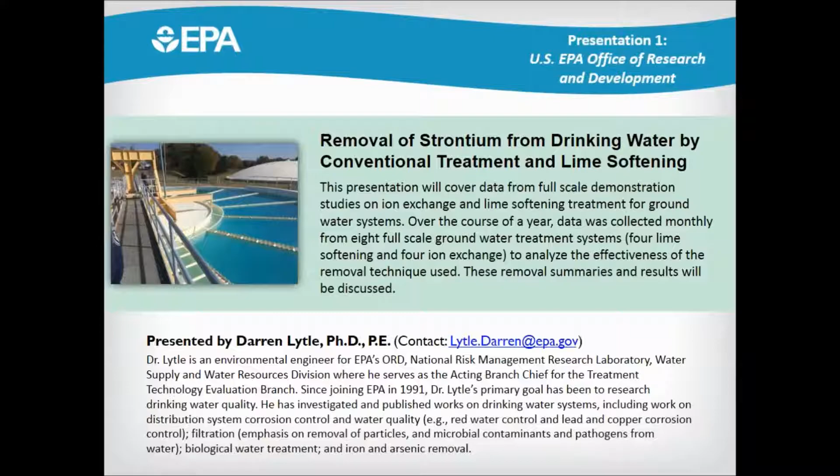All right, thank you, Tom. Just to start out, you can see the title of my slide has changed from the original title. The original title had conventional water treatment, and I can tell you right now up front that conventional treatment does not remove strontium, so we're not going to talk about that, but rather we'll talk about ion exchange and lime softening approaches. I want to start out by acknowledging my co-investigators, Hannah Chait, Dan Williams, Miley Pham, and Christy Mullen.

Let's see here. Get this. Okay, hold on a second. There we go. Okay, start out with my EPA disclaimer.

Just a little bit about strontium and its elemental properties. It's a naturally occurring alkaline earth metal, and most importantly, it behaves like calcium chemically. So certainly we can think of the treatment approaches that we use for calcium removal are probably going to be effective for strontium removal. It does have a number of manufacturing usages, including...

Alloys, fireworks, ceramics, glass. It's used to block X-ray emissions from cathode ray tubes. In terms of where it's found naturally, it's found and widely distributed through the Earth's crust and the ocean. In fact, if you see surface waters along the oceans, you'll find elevated levels of strontium in some of those waters impacted by the ocean waters. The majority of strontium compounds are soluble, and the main exposure routes are through drinking water and various foods.

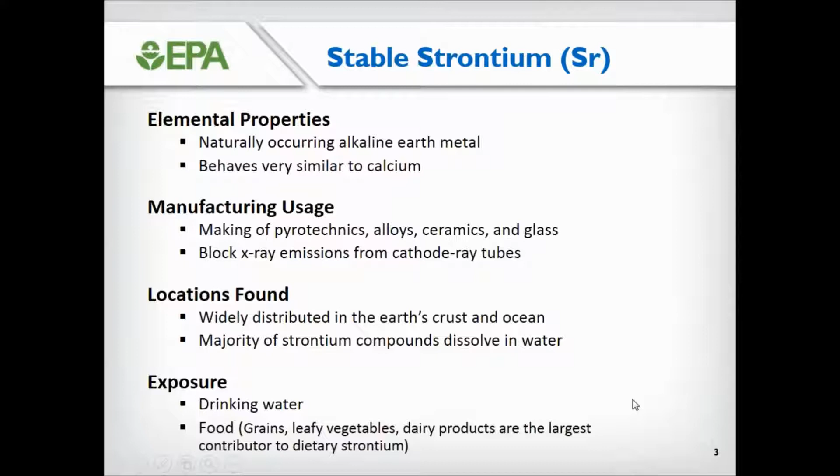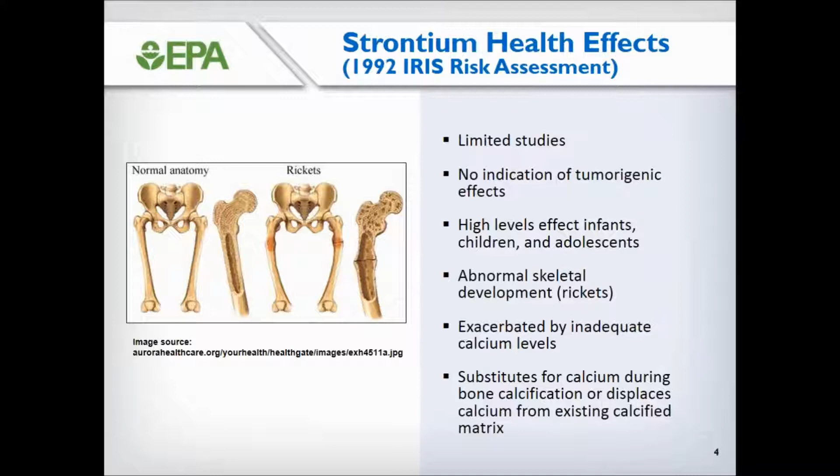Why we're concerned about it from a health respect and standpoint - admittedly there's limited studies, but there is indication that it affects the development of bones, basically by replacing calcium in the bone structure, creating skeletal abnormalities, rickets in particular. It substitutes calcium in the bone, and that's our main issue with regards to health effects, why we're looking at it.

In terms of regulatory relevance and where it stands, it's been on the Contaminant Candidate List 3, as well as the Unregulated Contaminant Monitoring Rule 3. Under the Unregulated Contaminant Monitoring Rule, a non-cancer health reference level of 1,500 micrograms per liter has been established, or 1.5 milligrams per liter.

In late 2014, the agency came out with a preliminary regulatory determination on strontium. In other words, the agency is going to take a serious look at the potential benefits and possibility of regulating strontium. As we stand today, the final regulatory determination has been delayed to consider additional data that includes health risk benefit analysis, health effects data, and treatment data and cost analysis. So that's where we're at with the rule - the agency is still looking at it and still considering it, which makes this presentation relevant.

So where is strontium? I was somewhat surprised, so we did some analysis looking at USGS's database and US EPA's STORET databases, and plotted the concentration of strontium across the country. The various concentrations, as we get darker in color, represent higher and higher concentrations. If we take that 1.5 to 2.5 milligram per liter concentration, a lot of groundwaters across the United States have elevated levels.

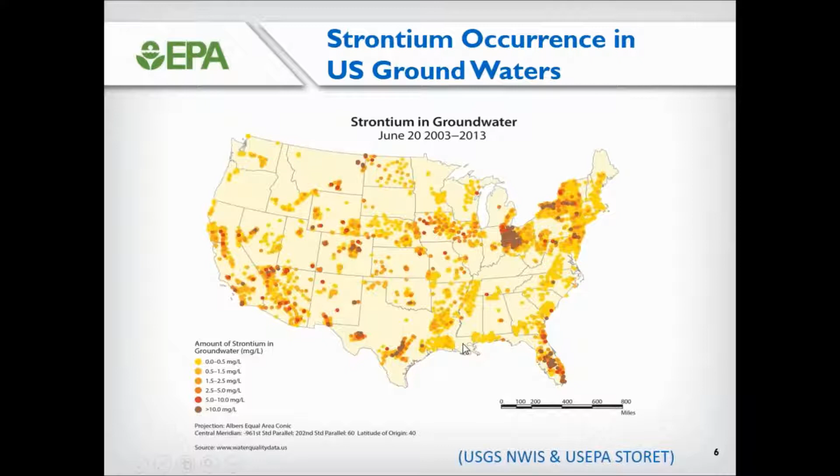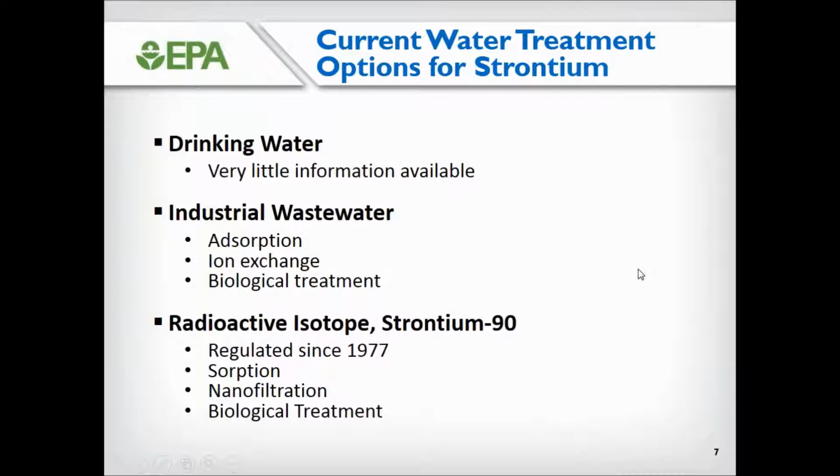When it comes to treatment, when we first started looking at this, there really wasn't and hasn't been a lot of information on the treatment of strontium from drinking waters. There's some information on industrial wastewater, looking at adsorption, ion exchange, and biological treatment. There's also been some publications on radioactive isotope removal of strontium-90, which has been regulated. So if you look at the literature, there's information on sorption technologies, nanofiltration, and biological water treatment as well. But in terms of specifically looking at drinking water and more historic drinking water approaches, not really a lot of information.

With that background, what I hope to do in the rest of my time is provide an overview of some of our past bench scale research looking at the impact of lime softening on strontium removal. This is work that one of our past master students, Alyssa O'Donnell, performed, and I'm just going to show you a couple slides of key highlights from that data.

Then I'm going to go into looking at data we've collected over the past year and a half or so, from full-scale drinking water treatment studies that used lime softening or ion exchange softening to remove strontium. Of course, those systems' goal wasn't to remove strontium - in fact, I don't think they even knew what the concentration of strontium was in their waters, but they're removing hardness ions, and that was the goal of their treatment.

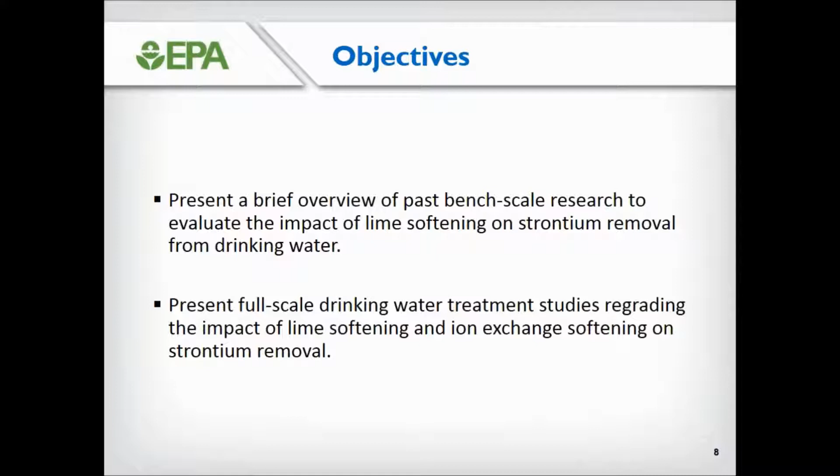Just briefly, the lime softening jar tests we performed - we did a lot of these, but I'll highlight a few - where we took 3 different groundwaters from this section of Ohio up the road from us here in Cincinnati, that had natural strontium concentrations between 4.2 and 21.8 milligrams per liter. Again, these are hard waters here in Ohio. We performed jar tests on these waters, as well as spiked groundwaters with strontium to give different concentrations, and also performed jar tests with laboratory waters. We used these jar tests to examine the impact of pH, calcium concentration, strontium concentration, and dissolved inorganic carbon concentration on strontium removal.

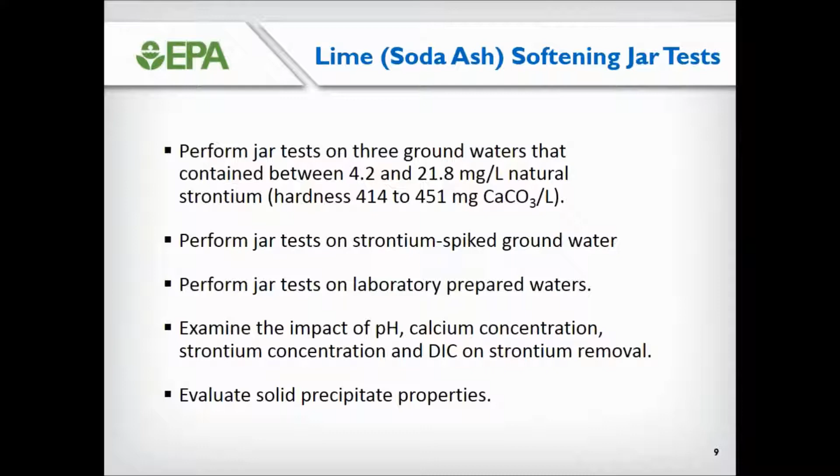We also did conventional treatment, or alum and ferric chloride coagulation experiments, and I can tell you up front, without going any further, that the best we could remove was maybe 5 to 10% reduction at best under a variety of conditions. So coagulation is not an approach to remove strontium.

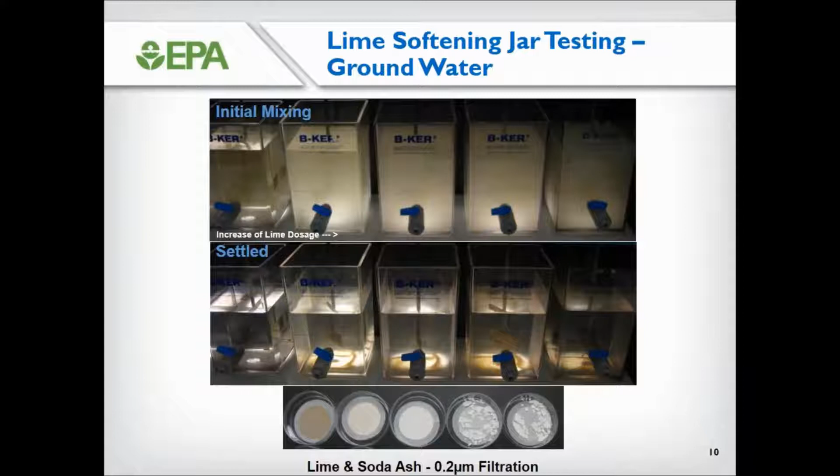I want to highlight a couple of jar test results that are pretty important, and I think will help us understand some limits and the relationship between water chemistry and strontium removal.

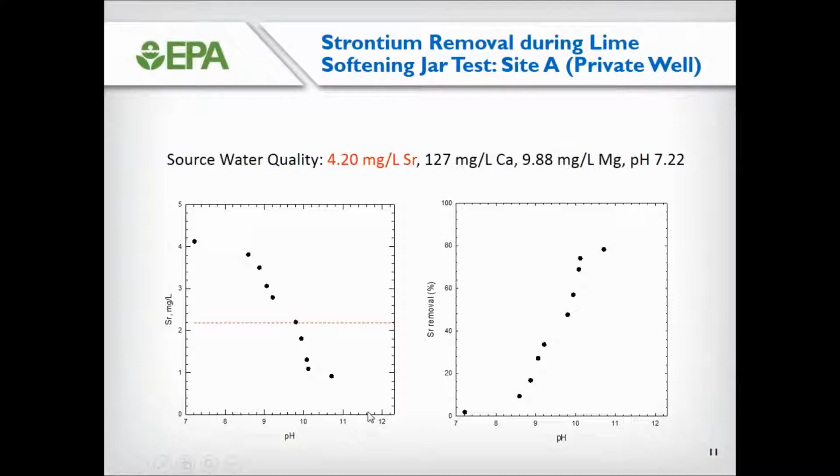We were reformatting the slide backgrounds, so this red line moved, but it's supposed to represent the 1.5 milligram per liter health reference level. The point here is that we can meet that in this particular water under optimized conditions.

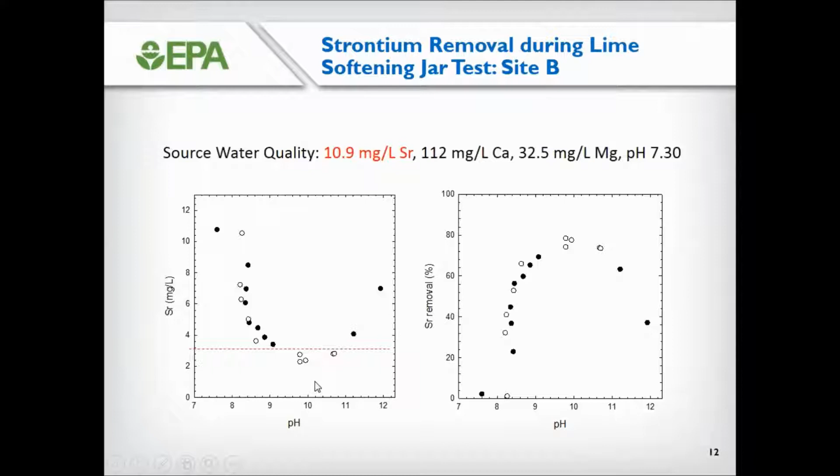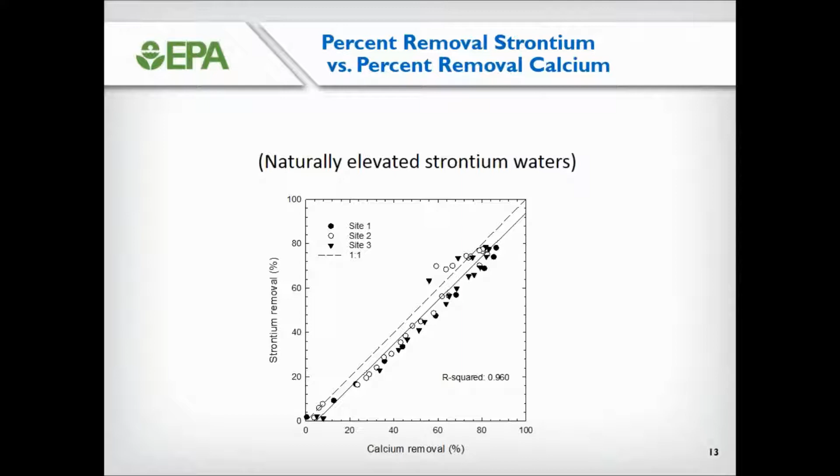This is a key take-home message from these jar tests: whatever percent removal of calcium we got, we got the same percentage removal of strontium. They were closely linked in terms of removal effectiveness, indicating they're being removed together, perhaps through co-precipitation or some other mechanism.

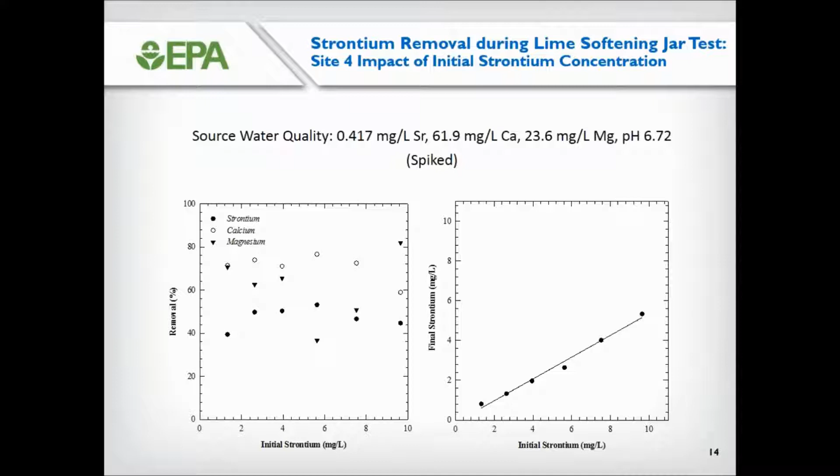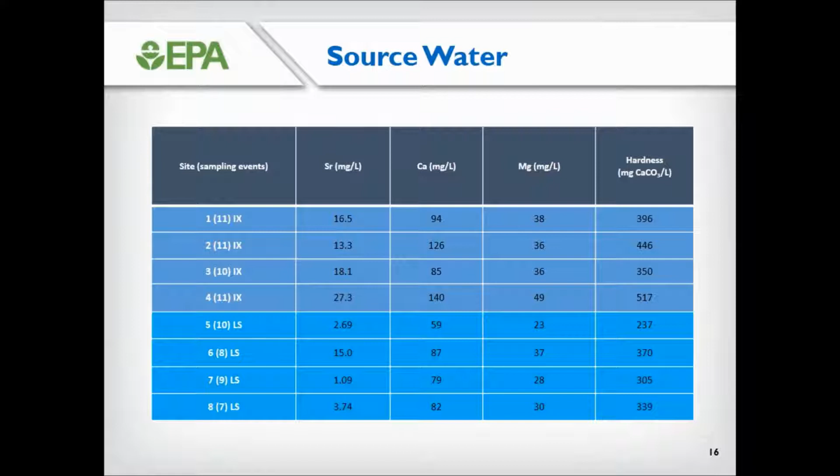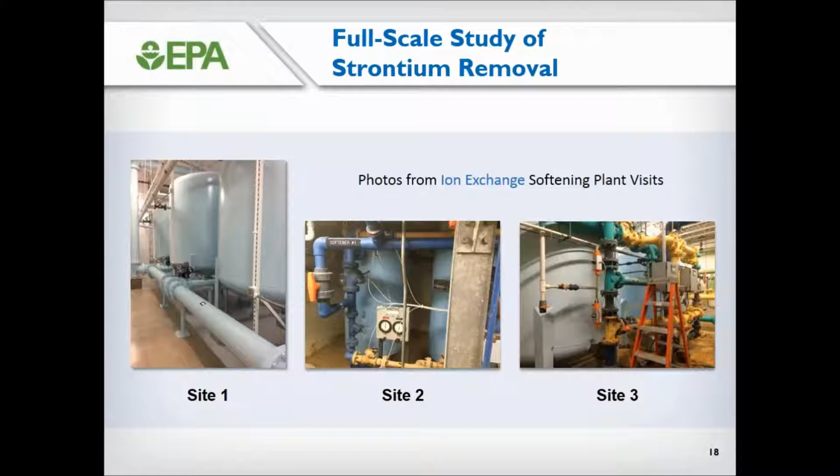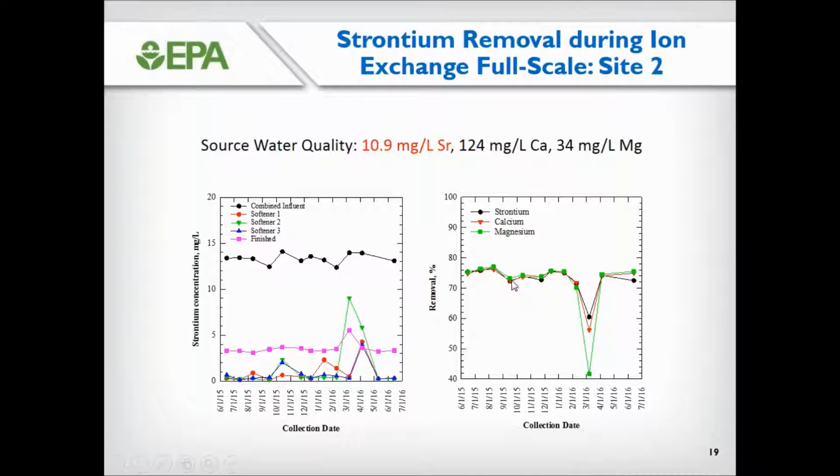Looking at things on a percent removal basis, with the exception of that time period between March and April, we're talking about 75% removal of strontium. But the softeners themselves are approaching 100% removal. It's the blending ratio that they use that gives the final concentration, or dictates the final concentration.

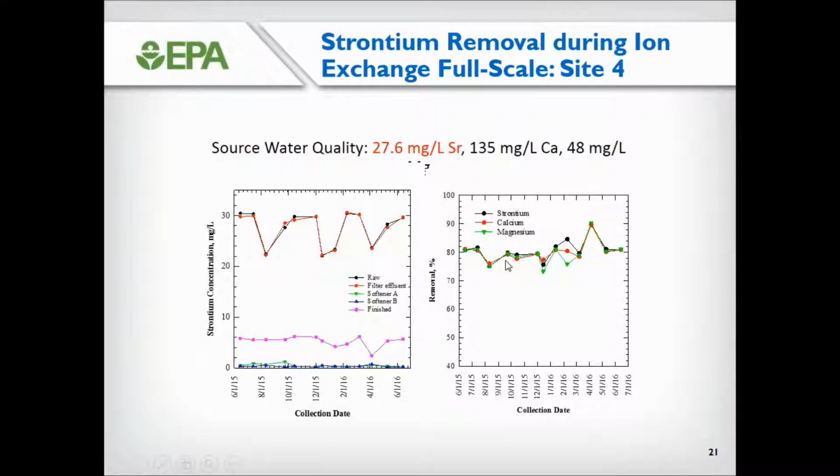Lastly, Site 4, a similar situation. This has 27 milligrams per liter of strontium in it, but the same thing: high concentrations in the raw and filter effluent. There's a filter in advance of the softeners in this particular plant. Again, each softener is very effective at removing strontium, and in this plant they're around 5 or so milligrams per liter because they're bypassing about 20% of the water around the softeners and blending it back later.

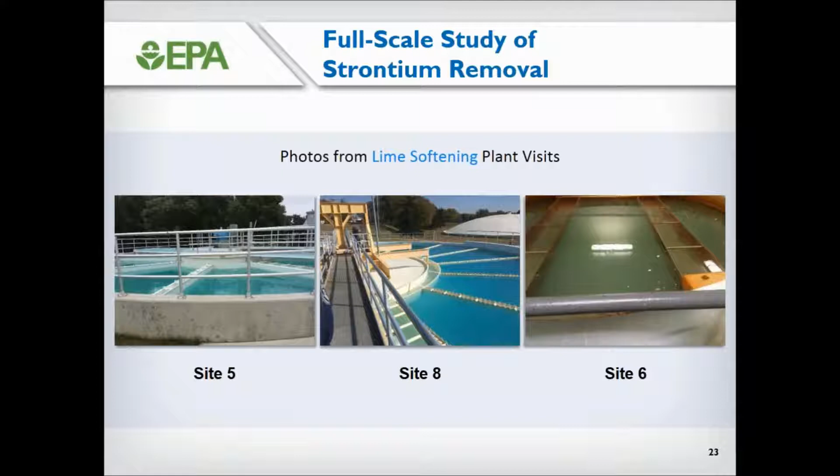In the case of softening, we'll start with Site 5. This lime softening plant had about 2.7 milligrams per liter of strontium, 58 milligrams per liter of calcium, and 22 milligrams per liter of magnesium.

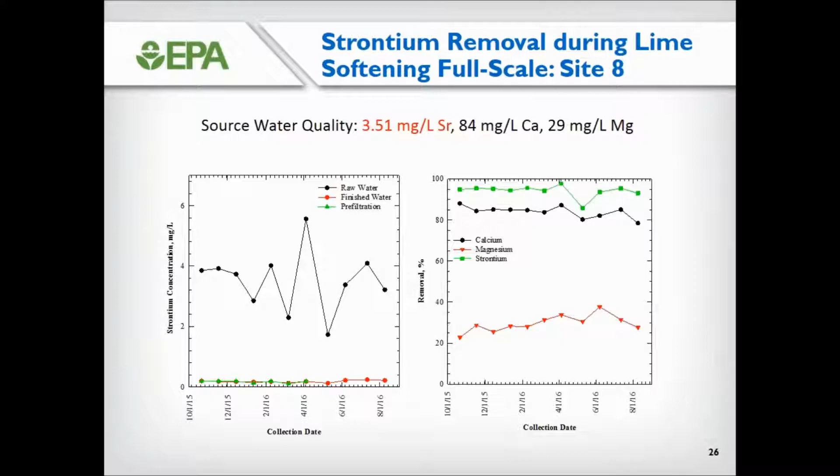So that's a quick overview running through some of the yearly monitoring we went through in these plants. But let's pull back now and take a look at the whole set of all 8 plants and summarize what we observed.

Again, with the ion exchange plants, the ion exchange softeners themselves, when operated properly, are very effective at removing strontium. They're going to get 90, 95, 100% removal basically of the strontium.

As it turns out, what dictates the final strontium concentration is how much you bypass. For those 4 plants, we calculated the amount bypassed based upon the raw water, the water going into the softeners, and the water coming out of the softeners. The bypass percent in these plants is between 20 and 30% or so, and that's really what's dictating the final strontium concentrations.

In this case, none of them are at 1.5, but these have very high concentrations to start. Could they get below 1.5? Yeah, but they would have to bypass a lot less of their water around those softeners. The average percent concentration, although I put numbers on here, is dictated by how much they bypass. Same thing goes with calcium and magnesium.

Whereas in the case of the lime softening plants, we have a range of percent removals, anywhere from 50%, 49%, up to that one plant at 94% removal. And we look at the initial concentrations and the final concentrations.

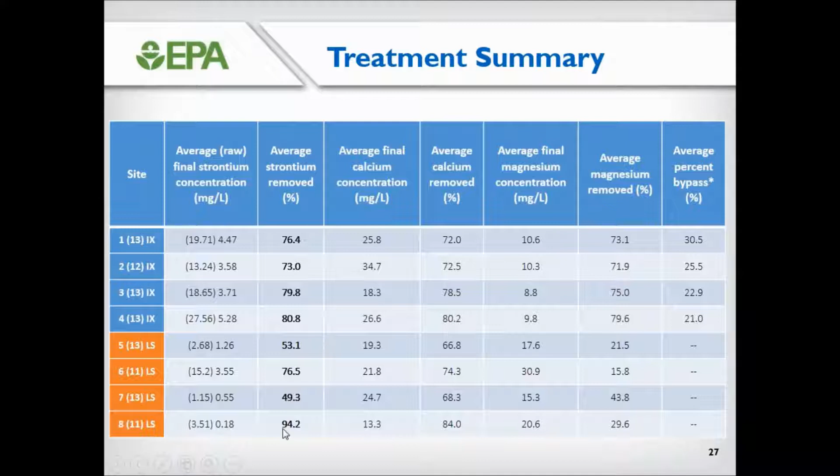That 1.5 number might be a challenge to meet if your initial strontium concentration is high, if that number is one we think about in terms of potential regulation. That could be hard to meet for a plant that has a high concentration to start. But the others were consistently below that number, and the percent removals are shown here.

I also thought I'd plot up just the percent removal of calcium and percent removal of strontium.

I showed you in the jar test that there seemed to be a nice relationship. We plotted it up and did see a nice relationship, although it isn't a one-to-one relationship like we observed in the jar test. I don't have a linear regression plot here, but you can envision a pretty decent line across all four sites for calcium removal percent versus strontium, so there does seem to be some relationship between the two.

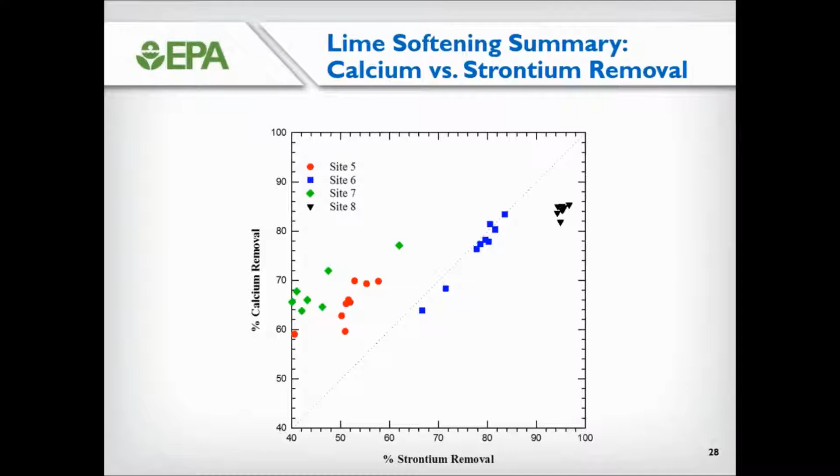When it comes to mechanisms of removal, we're interested in understanding that, and we've spent time looking at the residuals, the sludges, in the jar test. We tried to determine what is there - is strontium carbonate, for example, precipitating out? We found it was not. Instead, calcium carbonate was precipitating out, with strontium presumably mixed into the matrix of the calcium carbonate, actually impacting it mineralogically. We need to do more work to understand exactly what's happening, but there's a lot of literature in the geochemical field on the relationship and impact of calcium on strontium in calcium carbonate precipitation. We need to do a bit more to understand the precipitation chemistry here, but I think it's going to be interesting work, so we're going to continue with that.

Looking at the sludges from the two lime softening sites we got material from, Site 5 and Site 6, we find the strontium concentration as a weight percent is 0.64 and 2.72 respectively. That's dictated by how much strontium is present - Site 6 has more strontium, so it has a higher percentage by weight of strontium in the lime sludge.

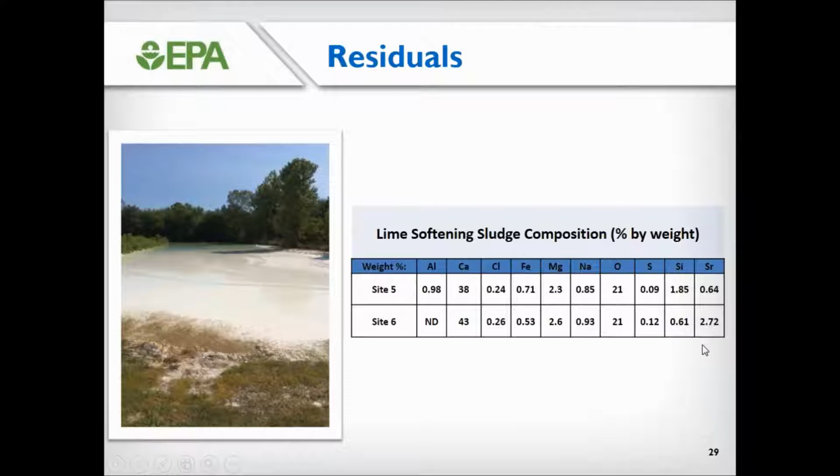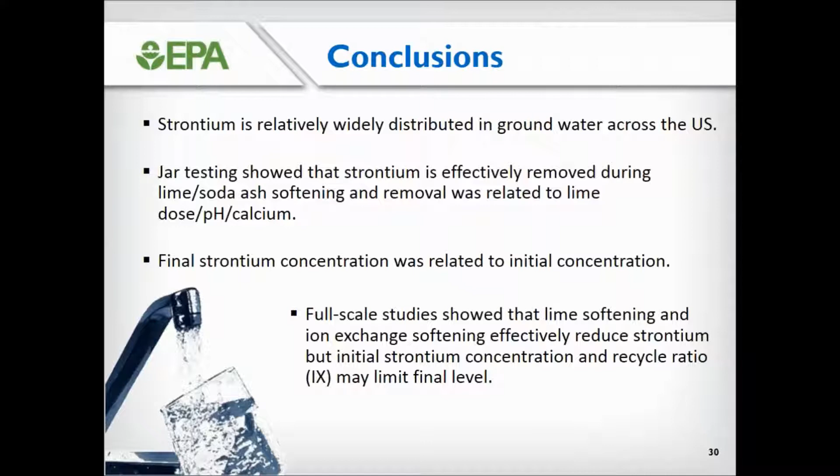Jar testing showed that lime is effective at removing strontium, although there seems to be a relationship between pH, calcium, and initial strontium concentration. The final strontium concentration was related to the initial concentration - the more you have, the more difficult it is to get down to a low level. Lastly, I demonstrated a lot of data on full-scale studies showing that lime softening and ion exchange softening do effectively reduce strontium concentration, but again initial strontium concentrations are important. For ion exchange softening, the recycle ratio will really control what you can achieve, because the softeners themselves are very effective at taking strontium out.

Lastly, I'd like to acknowledge a couple folks, Steve Harmon and Keith Kelty, for water and solids analysis help, and of course all the folks from the water utilities who have been very kind to us and helped us with this study. Thank you.

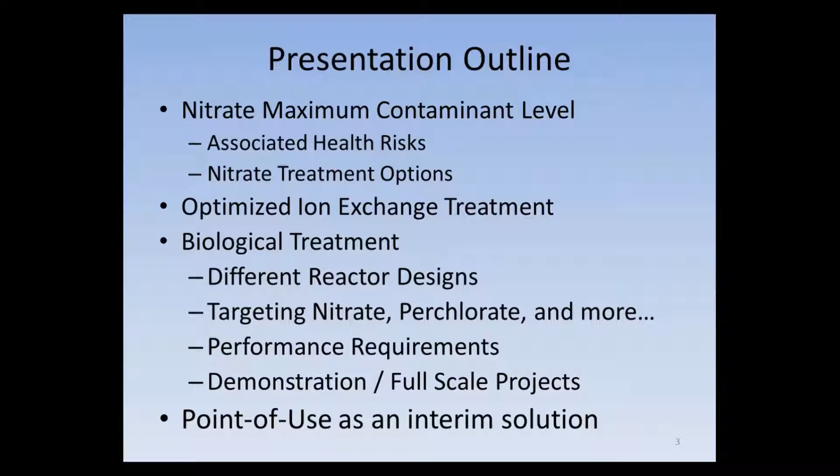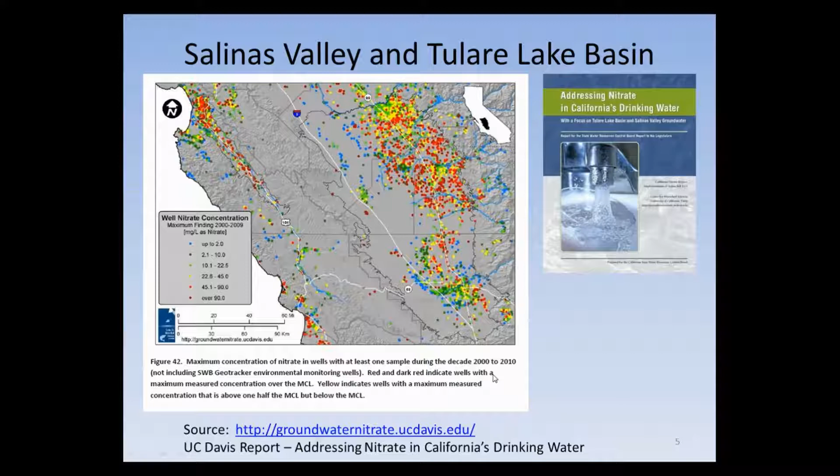Touching on the nitrate maximum contaminant level: as with the rest of the country, the nitrate MCL is 10 milligrams per liter as nitrate as nitrogen, and for nitrite the MCL is 1.

For nitrate, we consider it an acute health risk, with significant health effects from ingesting water over the MCL even for a short period of time. The vulnerable populations are infants below age 6 months and pregnant women. The big concern is that nitrate being reduced to nitrite in the infant stomach can cause blue baby syndrome — it can interfere with the oxygen-carrying capacity of the blood, and the baby can potentially turn blue due to lack of oxygen.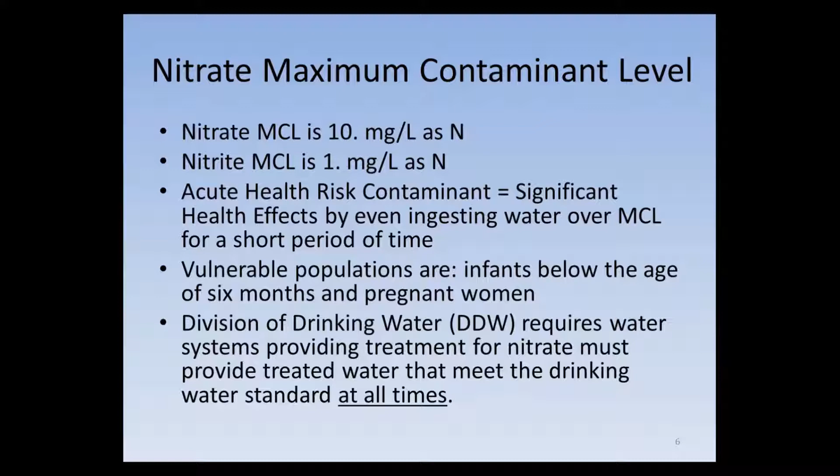So that's the vulnerable population for nitrate. For the Division of Drinking Water, our program requires systems that provide treatment for nitrate to make sure the treated water is meeting the drinking water standard at all times. They need to really have good, robust treatment that's meeting the standard all the time.

Hey, Eugene? Yes, this is Tom. Sorry, we have a couple comments that you're hard to hear. Could you get a little closer to the mic, perhaps? Is this any better? Yeah, I think that's a little better. Thanks.

For the typical treatment target for people providing nitrate treatment, we recommend, and most proposals will start, at about 80% of the drinking water standard, the MCL, as the starting point for treatment. For the online nitrate analyzer that's available these days, it really has allowed water systems to blend and treat a lot more effectively.

In the past we only had grab samples or laboratory analyzed samples available, but online analyzers have really helped water systems optimize treatment. However, these analyzers are quite expensive. They require a skilled technician to take care of them, and they cost around roughly $16,000 each.

So for systems that can afford the online analyzers, after a good performance record, we allow them to actually move up closer to the MCL, but at all times the treated water remains below the MCL. A treatment target of 80% can typically be achieved either by blending the treated water with a bypass flow, or by treating 100% of the water with some nitrate leaking through the treatment process, or a combination of both to achieve the 80%.

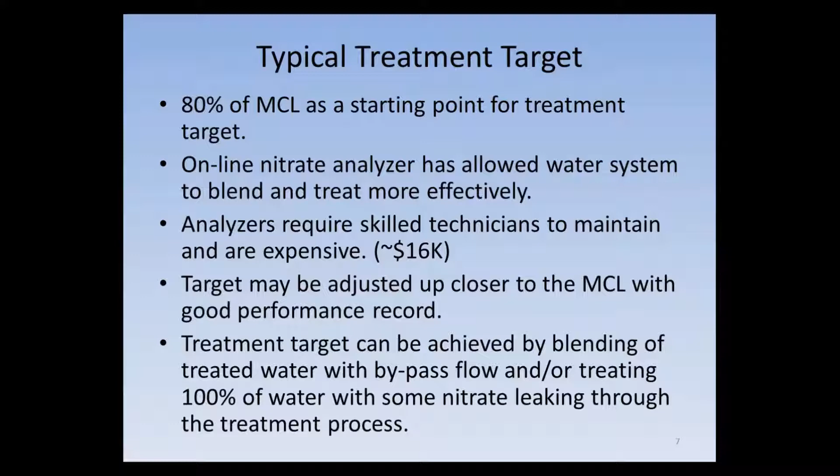You may ask, why don't we treat to a lower level? It's strictly cost, because if you treat nitrate to any lower level, the cost goes up quite a bit, and water systems already have difficulty meeting the MCL at 80%.

Here's a good diagram for nitrate treatment options. The best available technologies identified in regulations for nitrate are ion exchange, reverse osmosis, and electrodialysis. Typically in California we only see ion exchange as the primary treatment technology, along with reverse osmosis on a point-of-use scale. There are very few systems using reverse osmosis on the full scale, probably due to the disposal issues of the concentrate from nitrate treatment.

For most water systems, especially smaller ones that have a nitrate problem, we go through non-treatment options first. These include well abandonment - if they can drill a new well that's below the nitrate MCL, we much prefer that because it eliminates long-term O&M. We also look for alternative sources or blending, such as purchasing water with lower nitrate concentration from a neighboring system and blending it down, or constructing pipe works to mix the water together to below the MCL.

Now, if they have exhausted all of that, including potential consolidation with a nearby system, the only thing left we can do is work with them on treatment options.

For treatment options, primarily until now we have worked on the nitrate removal side, using either ion exchange or reverse osmosis as the typical approach. Ion exchange is the full-scale system, while for RO most are point-of-use devices. For electrodialysis, we really don't have much - I think we only have one treatment plant in the state of California, and it's not for nitrate treatment. So we really haven't had anyone propose or do full-scale electrodialysis for nitrate treatment.

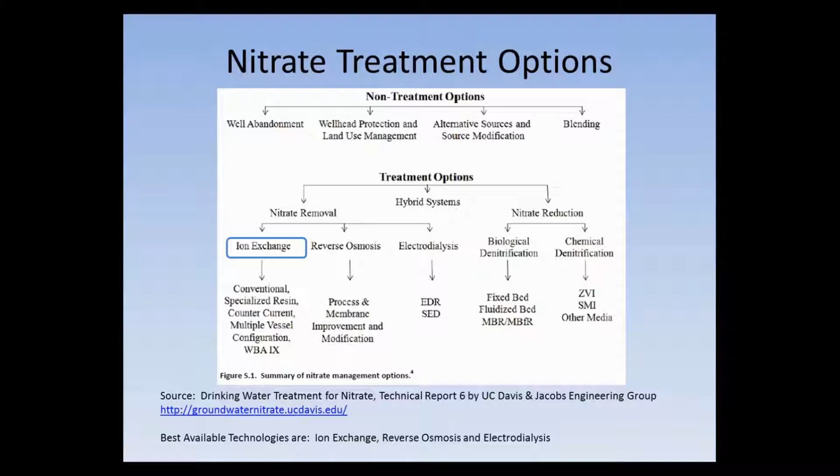So I'm going to touch on two topics, first the general background on ion exchange. As you know, ion exchange has been around for a long time. It's a proven technology, used successfully for nitrate, arsenic, and perchlorate removal. They use different types of resins based on the targeted contaminant.

For technical considerations, when you install nitrate treatment, it's really important to remember the performance. When you have a virgin new resin, it's going to perform best, and then it really depends on the regeneration process. As you regenerate, it may lose capacity over time, so it's really critical for you to regenerate it pretty well.

Also for nitrate peaking is a concern, especially when you use a non-nitrate selective resin. As the exchange capacity for the ion exchange resin is filled up, sulfate can potentially bump off nitrate, resulting in a nitrate spike. So it's really important if you're targeting nitrate treatment, you need to use a nitrate selective resin unless you have taken other precautions.

Then there's also the regeneration method. There are systems out there that like to do co-current regeneration and then countercurrent. And then one of the key things to deal with is treatment residuals. You have a really high nitrate concentration and salts that you need to dispose of as you regenerate these ion exchange resin.

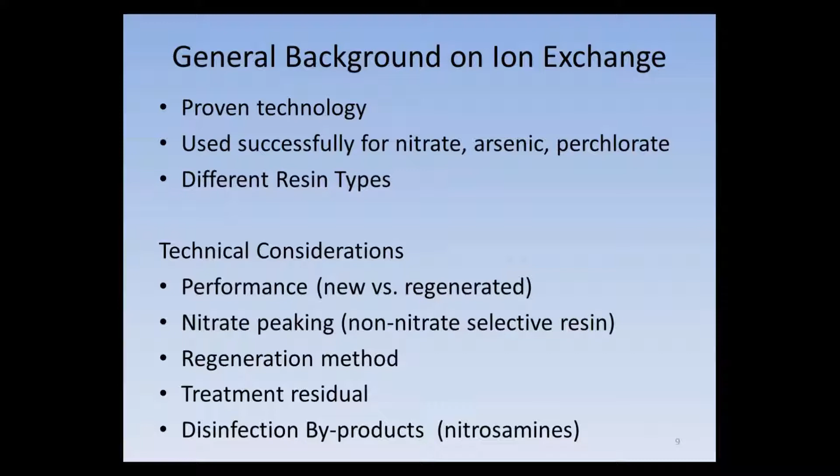So the basics, here's a diagram from ion exchange. If you're not familiar with it, it's actually very similar to a household softener, but you just use a different type of resin. When you're doing softening, you're using a cation ion exchange resin. When you're doing nitrate treatment, you are using an anionic resin.

That's the only difference. So in this case, as typical, raw water will be coming in from the top of the ion exchange resin bed. It will go through, and in here, the chloride ion will be exchanging with the nitrate ion, which are both negative. So the water coming out has higher chloride concentration and the nitrates being absorbed, being exchanged onto the ion exchange resin.

And during the regeneration process, you use a very high strength sodium chloride solution, which is typically table salt. And then pretty much you knock off all the nitrate and sulfates from the resin, and then you end up having a lot of chloride available. And then you can put it back into service. That's pretty much the basics for ion exchange.

So the number one issue for dealing with ion exchange is brine disposal. There are a few key innovations for brine volume reduction that have really helped ion exchange treatment. The first thing, as I've mentioned earlier, is the online analyzer. It's able to allow the water system to operate closer to exhaustion for the column. So online analyzer-driven operations allow regeneration only when the columns become exhausted.

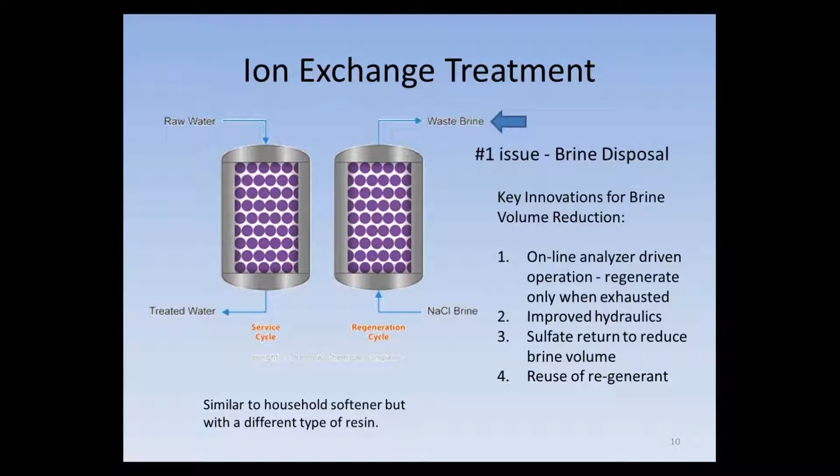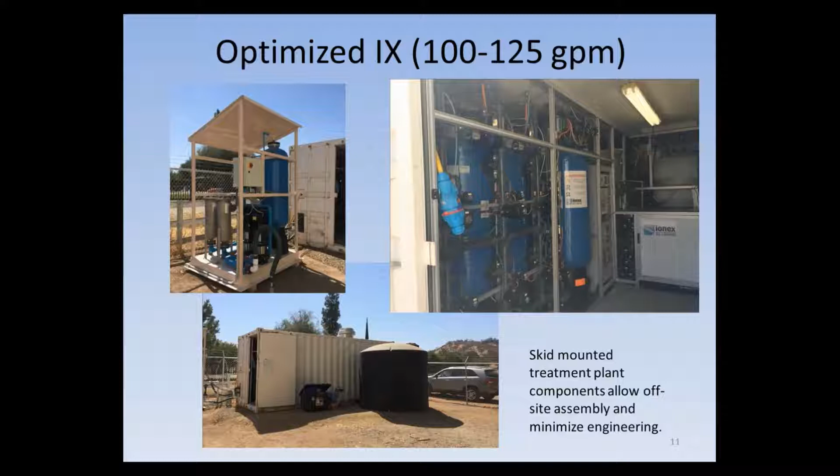And for the ion exchange treatment cost, if you look at it, the key thing for treatment is the capital cost for the treatment plant. The O&M cost is key here - it's the salt cost and brine disposal and O&M. These are the key portions of the cost that water systems often need to bear in the long run. Especially in our state, we have the state revolving fund available to help water systems with the capital cost, but the long-term O&M cost is the most important part that needs to be affordable.

It's pretty much a linear relationship, so as the incoming nitrate concentration increases, the salt cost and the brine disposal cost increase significantly, especially for inland systems. Brine disposal options may include evaporation ponds or ocean discharge after treatment.

For example, if you're in the Central Valley and you have nitrate treatment, you can either go to evaporation ponds located in the Central Valley itself, or maybe they need to haul it up to the San Francisco Bay or down into Los Angeles, where there's a wastewater treatment plant that can take the brine and have it treated prior to disposal into the ocean.

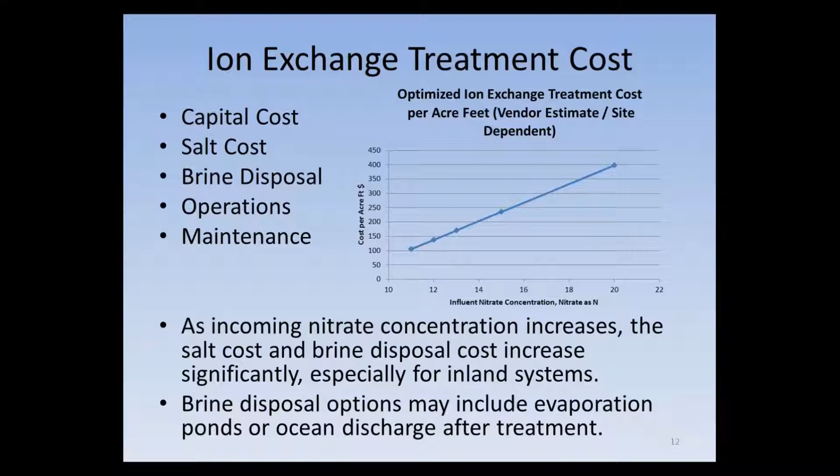For treatment performance, requirements and other considerations, one key thing is treatment plants need to be consistently below the nitrate and nitrite MCL. For ion exchange, we generally request continuous disinfection after ion exchange. To ensure treatment reliability, treated water nitrate must be monitored continuously, and the availability of an online nitrate analyzer has really helped with that. For operator certification in California, we classify that as a T2 treatment facility.

For ion exchange treatment, from our perspective it's a mature technology, but it may still be too difficult for small water systems to operate on its own. A possible solution we're trying to work on right now for small systems is technical consolidation, where we'll have treatment plants at multiple locations operated remotely and monitored by a contract service operator—technical consolidation because they are too far from other systems to physically connect.

We're also working on a proposal right now for a project where, if we have multiple systems using the same technology at multiple sites, it may be possible to reduce the brine disposal cost as well. Because as it stands right now, for each of these sites, when they need to dispose of brine, they need a truck from the particular water system to take it to the brine disposal facility directly.

But if they have similar brine characteristics and we can demonstrate the consistency of it, some of the brine receiving companies are willing to commingle the brine, and that could be a big potential for saving on brine disposal cost. So we currently have a project working on to see if that proves successful.

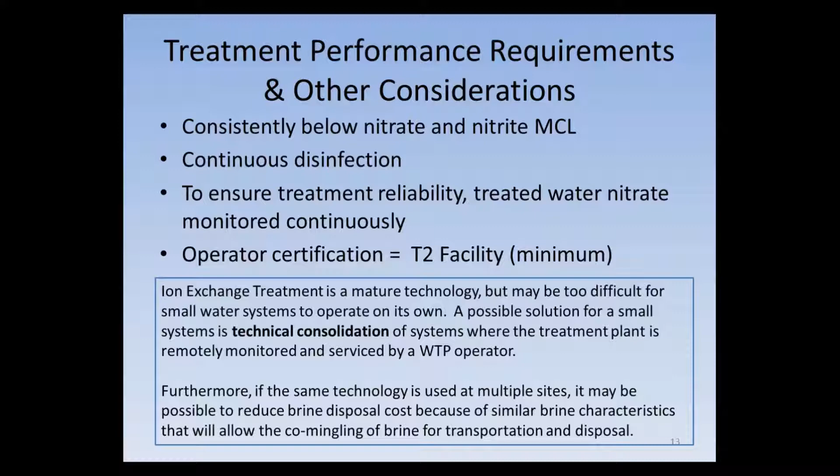Now I'm going to switch gears to touch on nitrate treatment options. The other part we have going on right now is biological denitrification. Biological denitrification of nitrate is nothing new on the wastewater side, but for drinking water we really have very limited experience with it. The fundamental for it to work is if you have raw water with high nitrates coming in, you need to provide an electron donor.

The electron donor of choice for the treatments we have right now is acetic acid, or vinegar. The water goes through a biological reactor that is anoxic, so the nitrate in the biological reactor is reduced into nitrogen gas—harmless nitrogen gas that can be released into the atmosphere.

After the biological reactor, the water goes through a post-treatment system to filter out the excess biomass that has developed in the bioreactor. It's not a surface water treatment rule filtration process, but we have filtration to take out the biomass, followed by disinfection to inactivate the biological activity present in the water, and then the water is sent into the system as treated water.

And we have some filter waste from that. It's very similar to surface water treatment, so you can dewater the solids, and potentially the water can be recycled back to the head of the plant for treatment.

The denitrifying bacteria are the ones doing the work, breaking down the nitrate into nitrogen gas, and the denitrifying bacteria are actually naturally present—we do not seed any of these treatment plants. It's bacteria that occur naturally; you're just encouraging their growth and providing the biological reactor environment for them to grow.

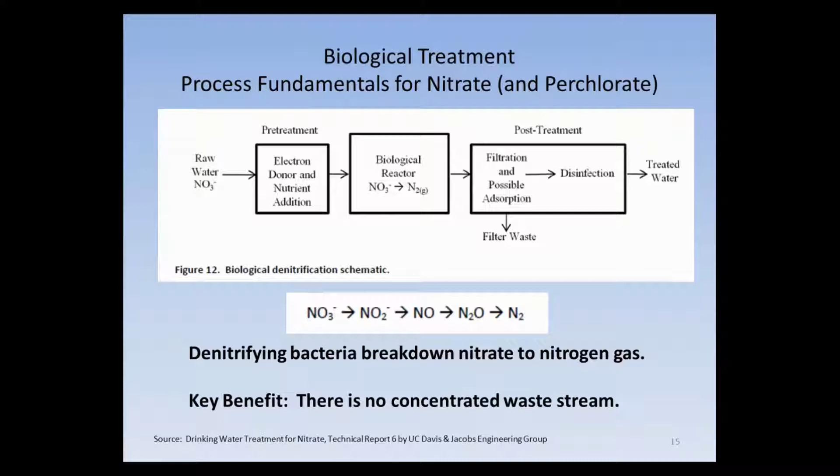The key benefit of the biological process is there's no concentrated waste stream to deal with, because the nitrate has been reduced to nitrogen gas.

So for the technology variations, we have actually 6 companies or cities that have been working on biological treatment, and the biological reactor design is the key variation among them. We have designs in fluidized bed that is upflow, and we have fixed bed that's downflow.

We have a continuous stir tank reactor type. In this case, they have some crouton-sized foam that's being stirred around in a reactor where they have attached growth for the biofilm. We also have some biocatalysts - this is the case where the bacteria actually comes pre-populated inside some capsules, so there's no startup process needed.

Then there's also membrane biofilm reactor - that's another one where the water goes through a membrane, tangentially flowing past the membrane surface for the biofilm growth.

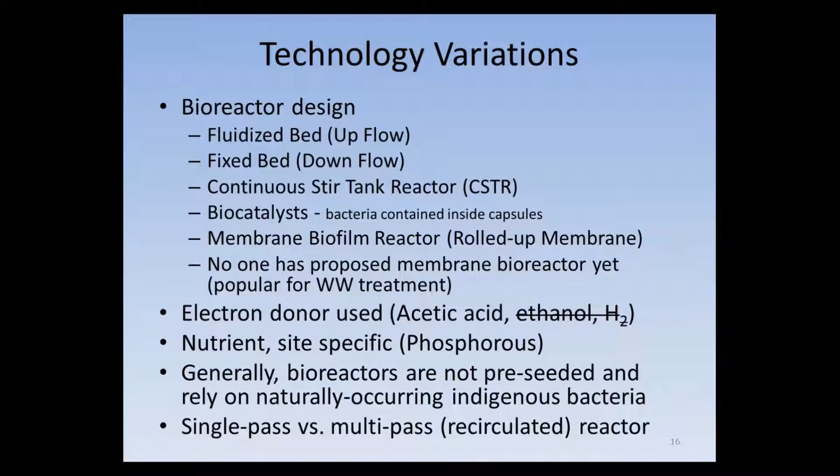The electron donor used, as I mentioned, is acetic acid, and the nutrient sometimes needed is phosphorus. Generally speaking, the bioreactors are not pre-seeded and rely on naturally occurring indigenous bacteria. And we have single pass and multiple pass systems. I'm going to go through some of these slides rather quickly, but we can answer some questions.

So for the reduction process, this is the upflow reactor sequence. You have groundwater coming in from the bottom. As it flows up the reactor, first it will take up all the oxygen for aerobic respiration, and then the next step goes to denitrification, followed by perchlorate reduction and sulfate reduction.

For nitrate treatment, with the use of online analyzers, we target the nitrate reduction to come to near completion - that's the target. There's a concern that during extended off cycles, if you have water just sitting in the reactor, it will consume all the nitrate and can go past that. So that's one of the concerns we work with.

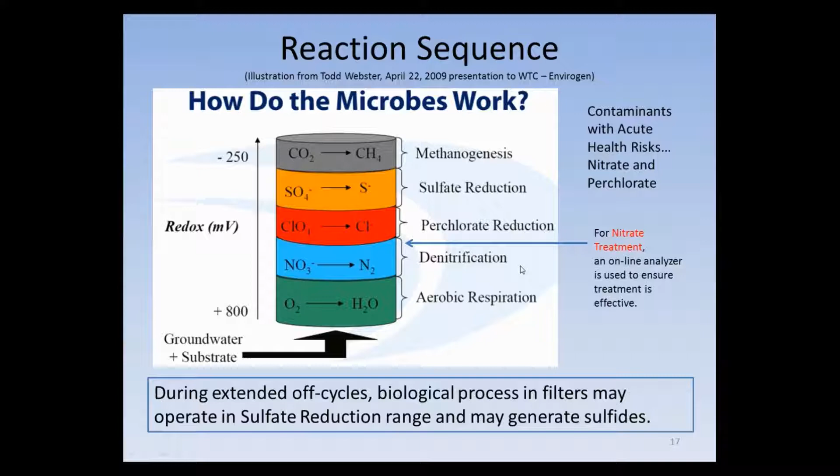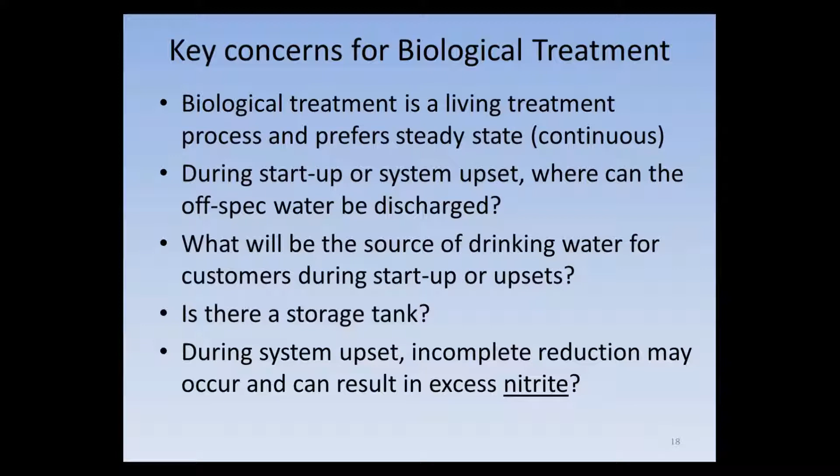So the key concern for biological treatment is that it's a living treatment process and prefers steady states. During system startup or system upset, where can we send the off-spec water? That's the key - what would be the source of drinking water for customers during startup and upsets? Because some of these are groundwater systems that do not have a storage tank. Also, during system upset, if there's incomplete reduction, there could be concern for excess nitrite as well.

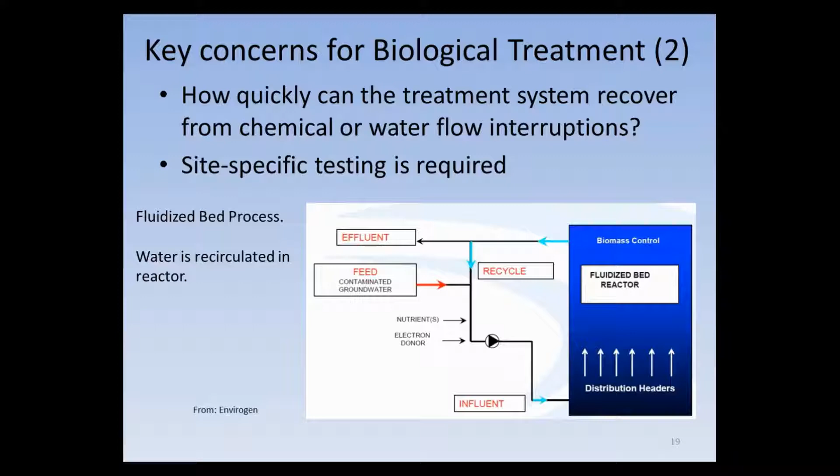So we really need to work it just right. In addition, a key concern for biological treatment is how quickly can a system recover after a chemical or water flow interruption - say a well broke down so the system has become dewatered, or you've lost chemical feed. How quickly does it come back? So there's a lot of site-specific testing that's required in order for us to permit a water system to go through it.

Right now we have one system that is demonstration scale for nitrate treatment. It's a fixed bed process using the process so the water comes up from the well. It gets its electron donor of acetic acid and phosphoric acid for food. It goes through the bioreactor, has an intermediate degas stage, and then a polishing filter for turbidity removal using a polymer, and then it's disinfected.

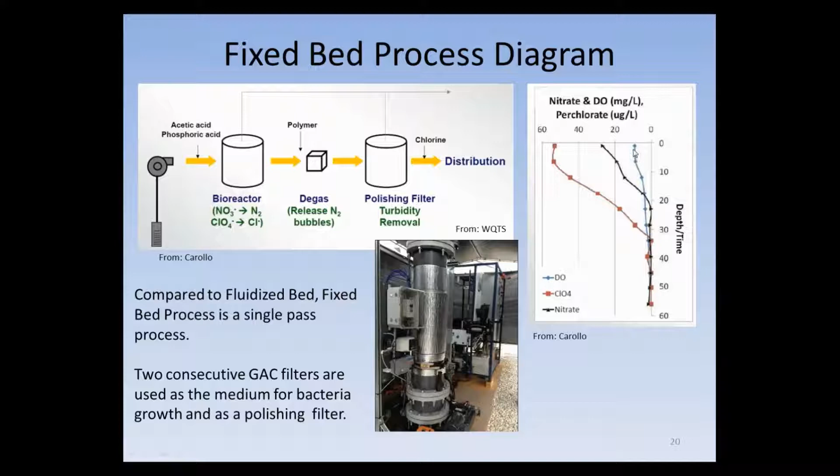So as you can see from a single pass, as the water goes down, the dissolved oxygen level drops down to near zero. The next one is the black line here - you can see the nitrate will drop to zero. And if you have perchlorate present, perchlorate will be the next to be removed. So for nitrate treatment, you will only be concerned about the blue line and the black line.

The demonstration we have in California right now is at the city of Delano, in Central Valley, at the Well 35 facility. It has a 570 gallons per minute well - 200 gallons per minute is being treated, and 370 gallons per minute is being bypassed. It's a full-scale demonstration facility that's in service now.

It actually came into service about 3 months ago. The water is being served to the community, and we've been getting good results from it - the biological process is working well, and they're actually on the way to allowing 24/7 operation without an operator on site. We're working on that currently.

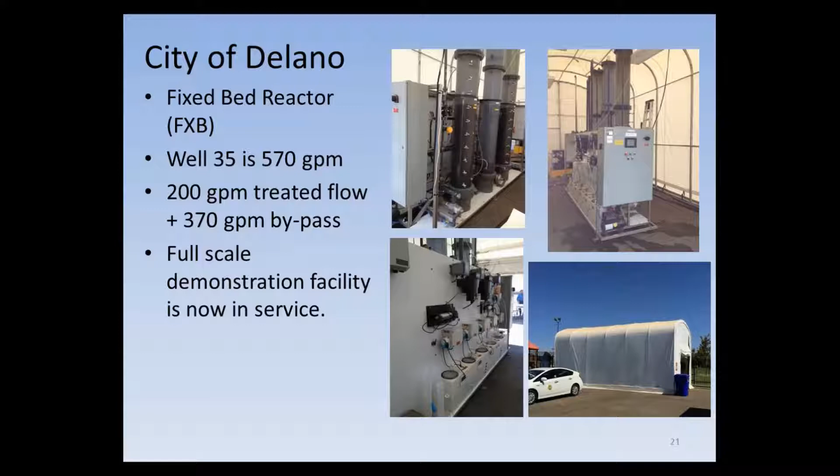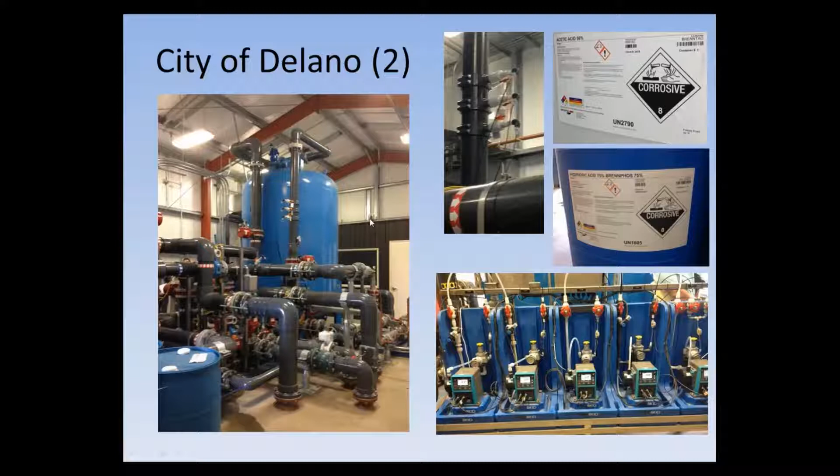Another project we have going on in the States right now is the biocatalyst system - this is the one with pre-populated little beads. This project is going on right now at Sunny Slope Water Company in Southern California. They're also using it for nitrate treatment. It's a vendor water system funded project, and it's a single pass system.

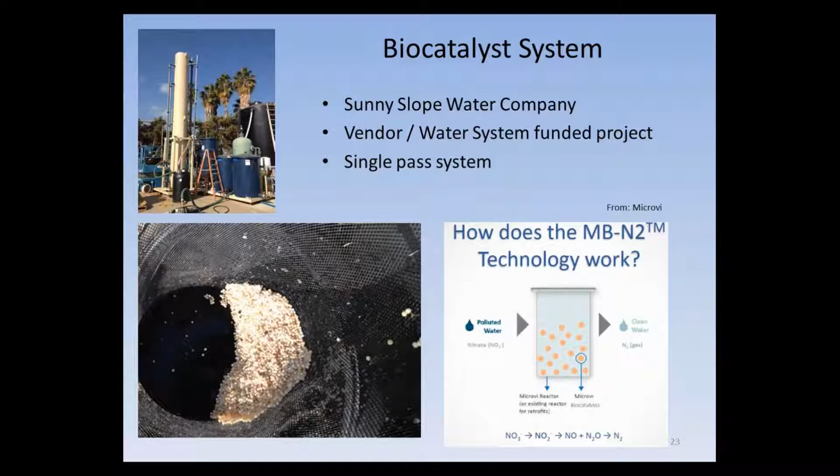So this system right now is going through testing. The water is not served to the public yet, but it should be coming real soon.

So the other treatment that I've mentioned is the CSTR type project, and then also the membrane biofilm. These two projects don't have any full-scale project right now, but they have gone through some demonstration scale work, and we have given them conditional acceptance.

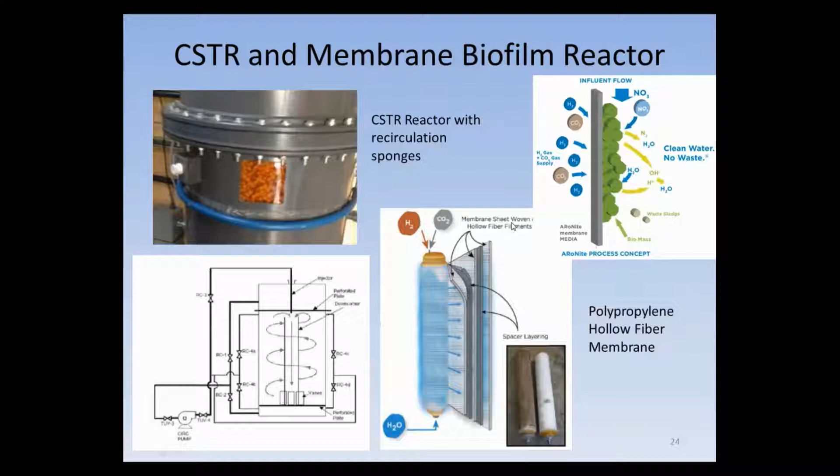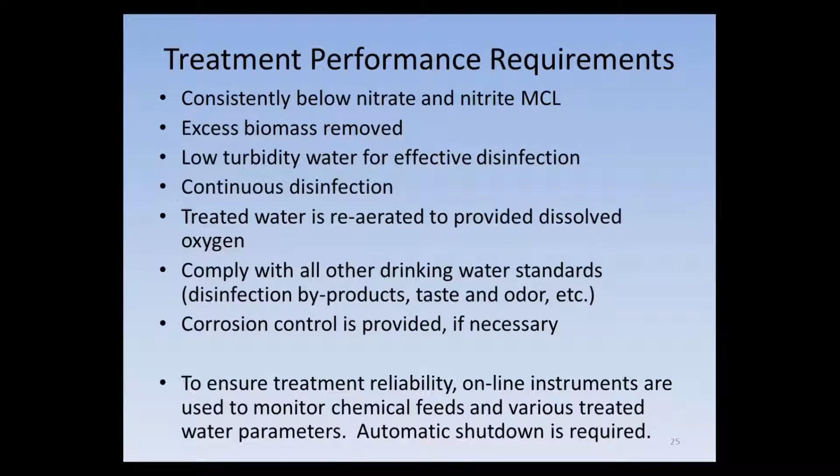So for treatment performance requirements, I think the key part, similar to ion exchange, is we just want to make sure the water is consistently below the nitrate and nitrite MCL. We want low turbidity for effective disinfection, and that the water is reoxygenated so there is adequate DO and no taste and odor problem.

So for other considerations for biological treatment, operator certification is important. It's more complex — it's a T3 facility in California. And one of the key challenges we have in California is there's not many water operators, designers, or regulators familiar with the technology. So we're working on this.

Hopefully we'll have more long-term treatment reliability, more data available, and learn how well it works on intermittent operation. We have quite a few projects going on, and we should be able to share our experience with you later when we get more results on how they work.

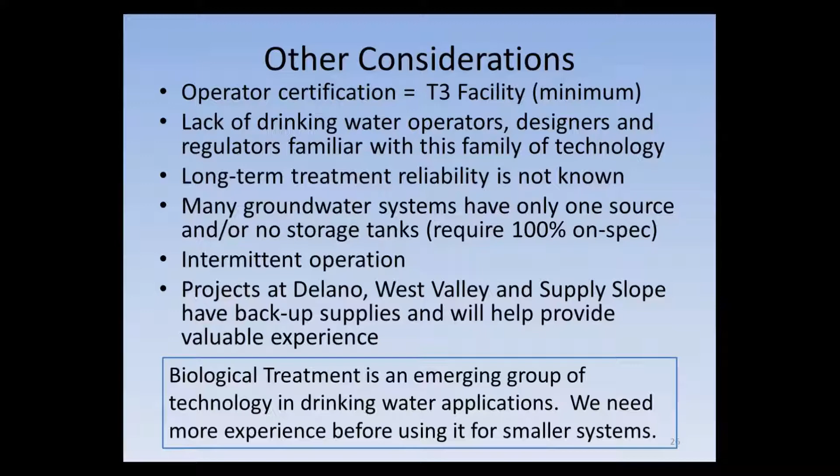From our perspective, biological treatment is definitely an emerging group of technology in drinking water applications, but we definitely need more experience before it should go to smaller systems. So here's some cost estimates, but I think I'm out of time, so I'm going to skip over that.

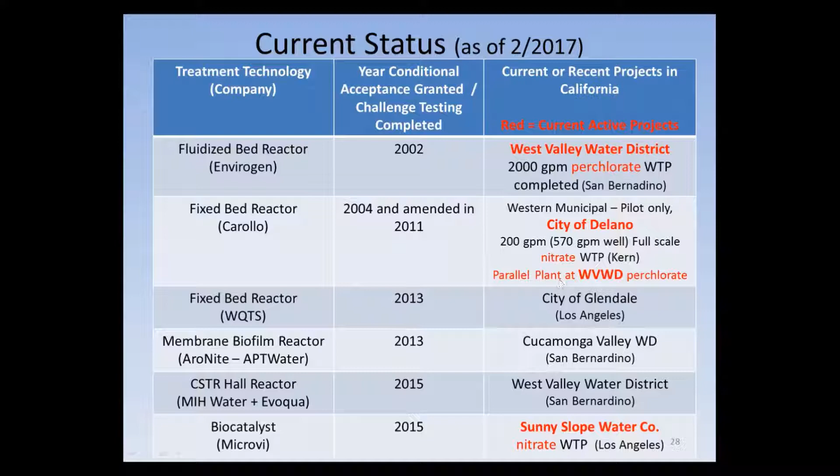So here is a summary of the biological projects we have going on in California. We have one in West Valley Water District for perchlorate treatment, the one I've mentioned in Delano for nitrate, and West Valley is also going to build a parallel plant with a fixed bed reactor that's coming on, as well as the project down in Sunny Slope for nitrates.

And so for treatment options, the last one I want to touch on is reverse osmosis. As I've mentioned at the beginning, we have a lot of small individual homes and maybe small systems with nitrate problems that are looking into long-term solutions, but they need an interim solution.

Point of use RO that's certified under the NSF/ANSI 58 standards is very effective for nitrate treatment, especially if the nitrate concentration is below 2 times the MCL. If your source water is greater than 2 times the MCL, an adequate feed pressure is critical.

So in that case, you may need to get booster pump systems to improve the efficiency of the RO system so it consistently provides water below the MCL.

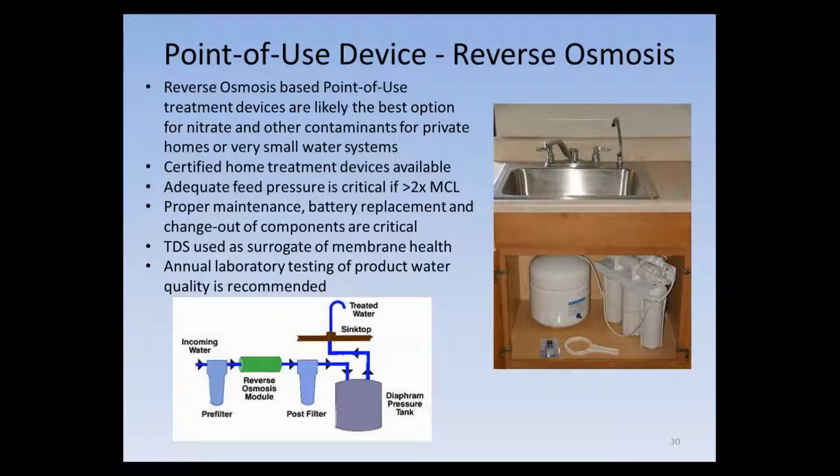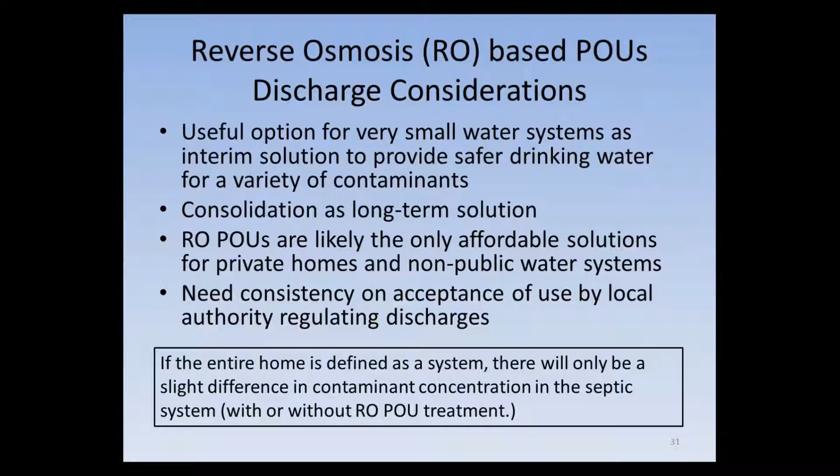And so for reverse osmosis-based point of use, discharge consideration is sometimes a concern, especially for some local authorities regulating discharges. But the key point here is that the net increase in nitrate concentration with a point of use RO is very small, because there's a lot of bypass water that's not being treated and goes into the same septic system, so the net gain for nitrate is very minimal.

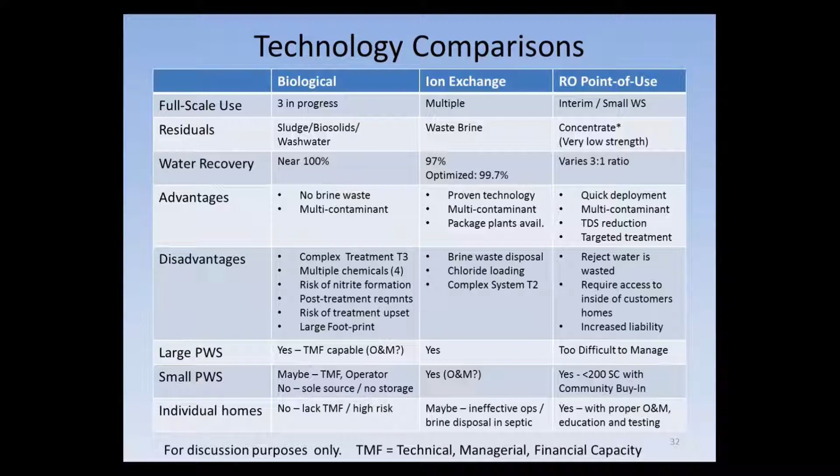So here's a nice summary table for the technology comparison. For the full-scale biological process, I need to correct that there are actually 4 in progress right now. For ion exchange, we have multiple systems in California, and the RO point of use device is used by a lot of interim and small systems.

And so the closing thoughts: there's no silver bullet for solving the nitrate problem. Probably a combination of different treatment technologies, regionalization and consolidation will be needed to solve this problem for California. Nitrate treatment technologies are complex to operate. The technical, managerial, and financial capacities and O&M costs remain the major challenges for a lot of our small water systems. And while we look for long-term solutions, interim solutions are also needed, as the above will require planning and coordination.